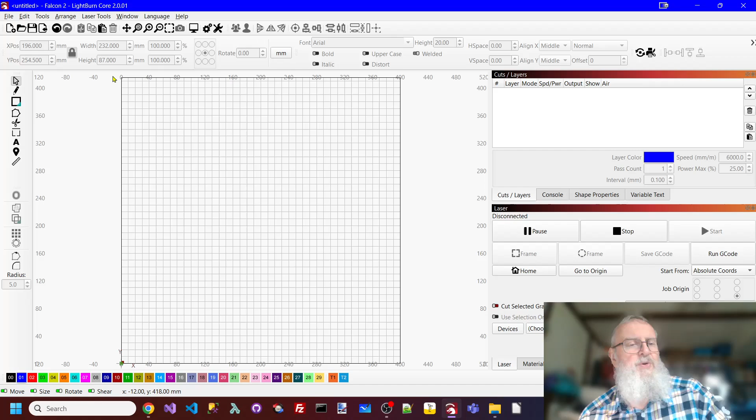So let's switch over to LightBurn, and here we are. This is LightBurn. So what I'm going to do is basically show you how you can effectively engrave borders to optimize your time. Now, you may or may not want to use one or more of these, but this is what I come up with. So I'm using LightBurn 2.0.01. It's the latest version. Most of the settings that I'm going to show you were available in earlier versions of LightBurn as well.

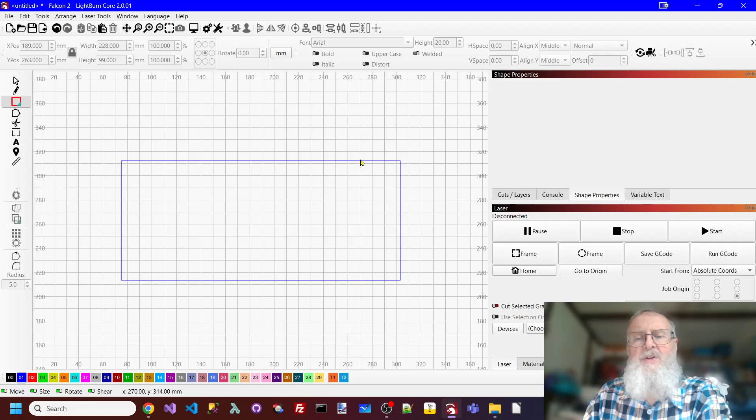So first of all, I want to create a rectangle. I'm going to put it back on line mode. Okay. And I'm going to zoom in here. Now, to make this interesting, if I was going to do a cutting board or a fancy sign, typically what I would do is change my corners. So I've done this in previous videos, but let's just go through my shape properties. And you can round them, so you can make them round. What I like to do sometimes is use a negative corner. Makes a nice little outline for a border.

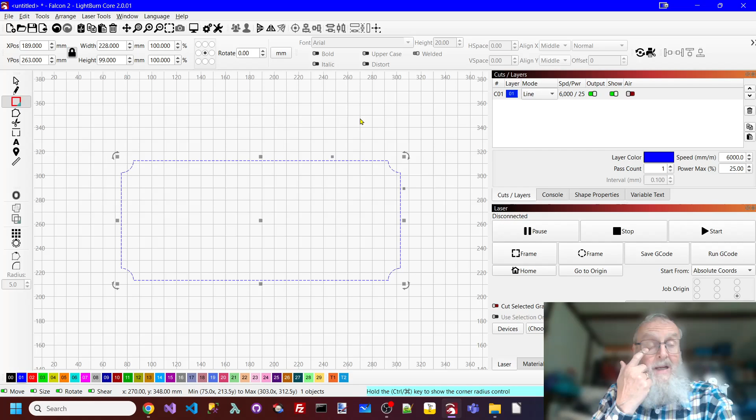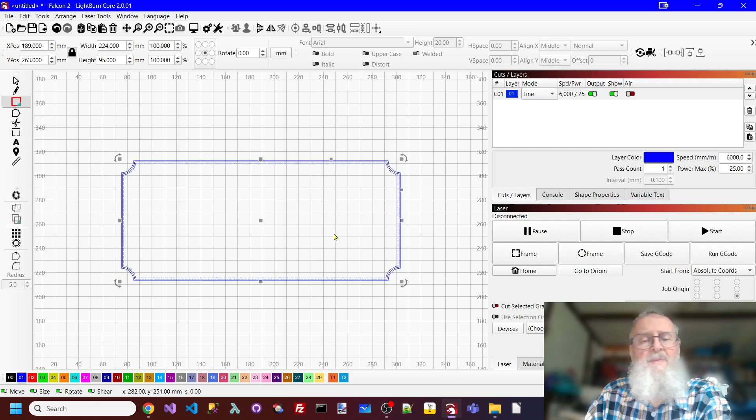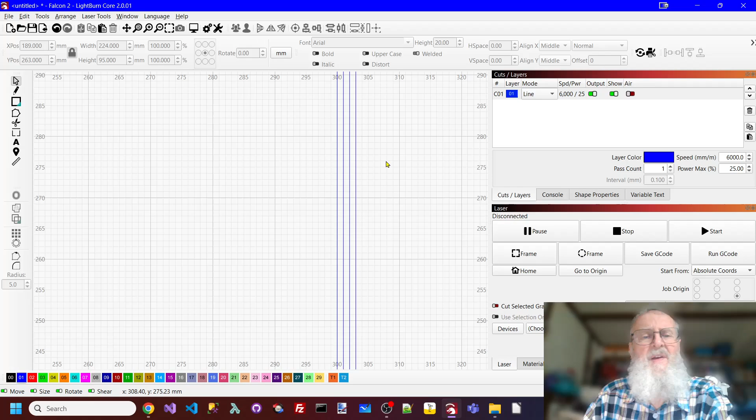Okay, next I'm going to create a bunch of duplicates of this. So I'm going to go to my offset tool right over here, and I'm going to go inward one. I don't need anything else. And I'm going to do this 2 more times. So there's one more. And to make it fancy, I'll do one more. So now I want to make sure I'm on my pointer tool. There we go. I'm going to group each pair of offsets. Okay, and go back to, now this is line mode.

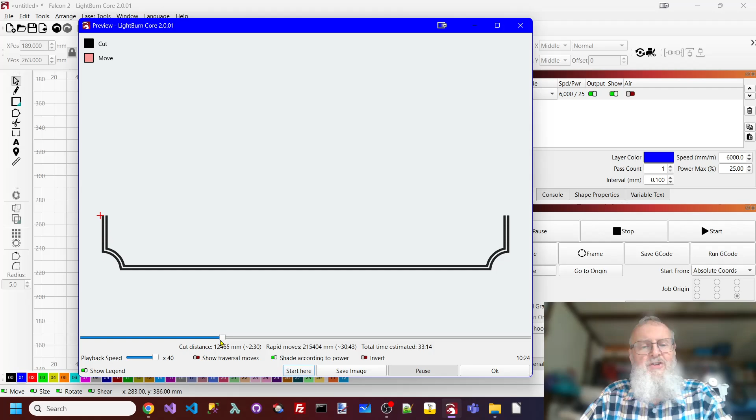Now typically if I want to make this fill, I go into fill mode, and there's my nice little border. You may or may not want to use double borders like this. Sometimes I find this kind of nice to use. But now I want to see how fast this is going to be. And 33 minutes just to do those borders. Now, if you had a lot of graphics or text images inside your sign or your cutting board, this might not be acceptable. So you can see it'll play, and I can walk through this play here. There's a lot of travel time. The laser head is moving back and forth. Okay, well, that didn't work very well.

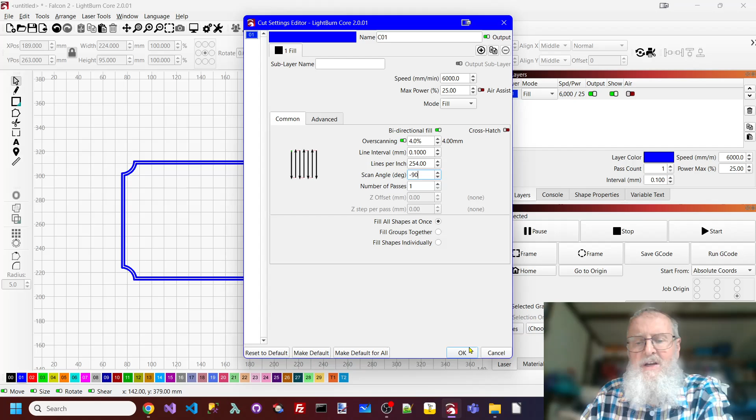So then you can go in here, and oops, I should have set this at 4. It doesn't matter. Let's just check the time here. 33 minutes. Okay. You could try a different angle. So let's go -45 for a start. So you can see where the laser head is moving diagonally. And let's check the time for that one. 37 minutes. Well, that didn't help at all. Okay, so let's try one more. Let's go -90, which is up and down. And check the time for this one, and that's 40 minutes. So I'm getting worse. Okay, so that's not working.

Sometimes you find by changing that engraving angle, scan angle, depending on what you're engraving, you can speed up your design. And I've used this several times. If I have some text that's vertical, then I will use a -90. If it's horizontal, I'll go back to 0. If it's an odd shape, I will change the angle. But let's go back and change this to 0. Okay, so that's one problem, the scan angle didn't really help. In fact, it made things worse.

So because we're on fill mode, if we go to the Advanced tab, there's a thing called Flood Fill. Now, Flood Fill doesn't work for all types of graphics fill, but it's especially nice for borders. So I'm going to turn on my Flood Fill. I'm going to go OK. Now remember, we had 33 minutes with a standard fill. And if I go to my preview mode, I'm down to 19 minutes, almost in half.

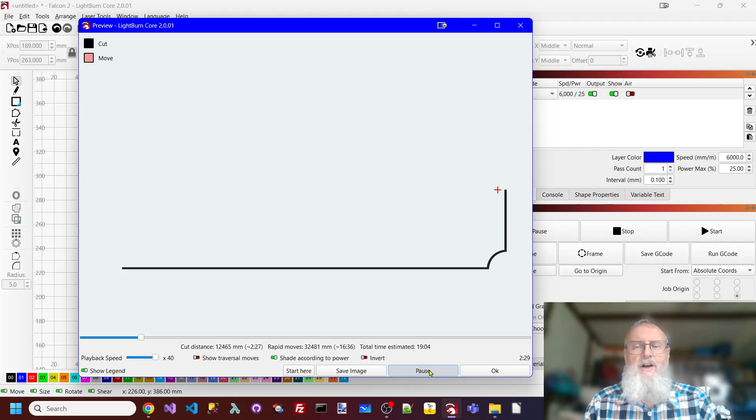Now let's watch what this does. This is kind of cool. It does that. Oh, look at that. It just does the outline. Now remember, I have 2 sets of borders here. So let's see what this does.

Here's the first one. And then it does the next one. So Flood Fill works great for borders. And, you know, I kind of like it. When I first started engraving, I didn't use it a lot, but you can see that I've cut my engraving time almost in half.

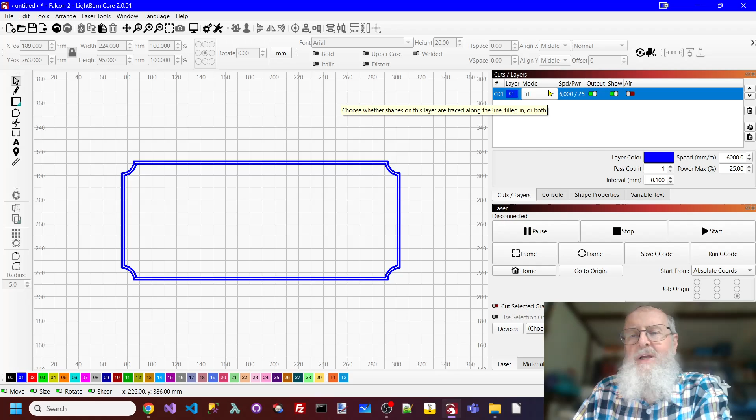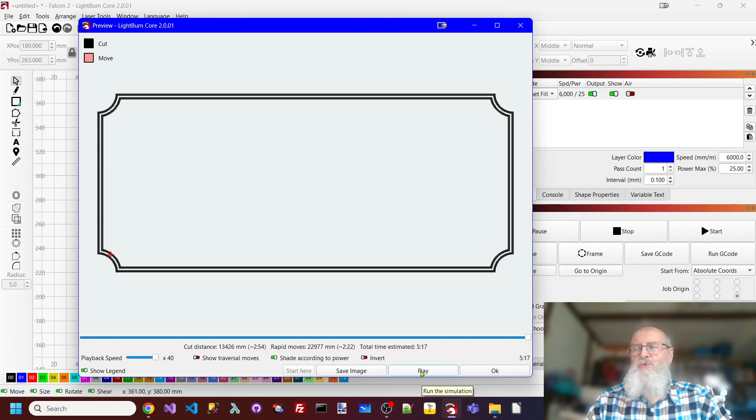Okay, so let's go and look at offset fill. Now remember, flood fill gave us 19 minutes, and this one gives us 5 minutes and 17 seconds. So what does this do? Well, let's go into play mode, and it just does a series of lines. Now this works pretty good. If I zoom in here, you can see it. Those are all those parallel lines.

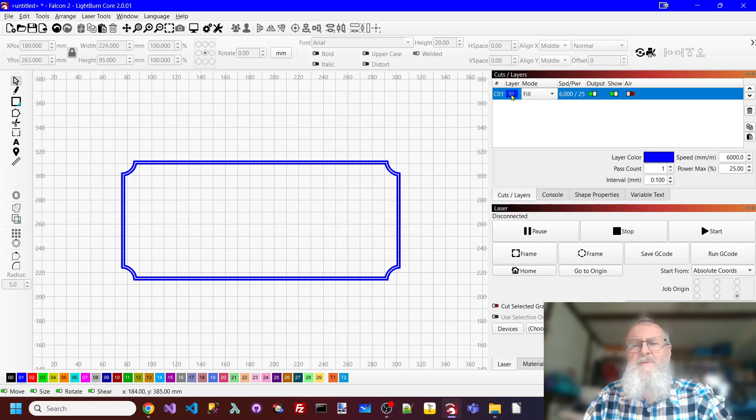Okay. Now when I go back to fill mode, and I'll make sure this is on flood fill, which it is, and I zoom in, you can see the same parallel lines, and these you can change. For example, I have it at 0.1. If I go to 0.08 and look at this, see the lines are a lot closer together, and it takes a little bit longer. That setting, which is your line interval, will depend on your laser. Now my laser can do 0.08. But if I would do a border, I'll just go back to 0.1.

The other thing I didn't mention is this over scanning. Remember, I originally had it at 2.5%. And that was great for my old laser, whose max speed was like 2,500 millimeters per minute. The one I'm using now, I typically do my fills at 6,000. So this over scan at 4% is really good for fill, as the laser will move, turn off and move 4% off, left and right, or up and down, to give you a cleaner burn.

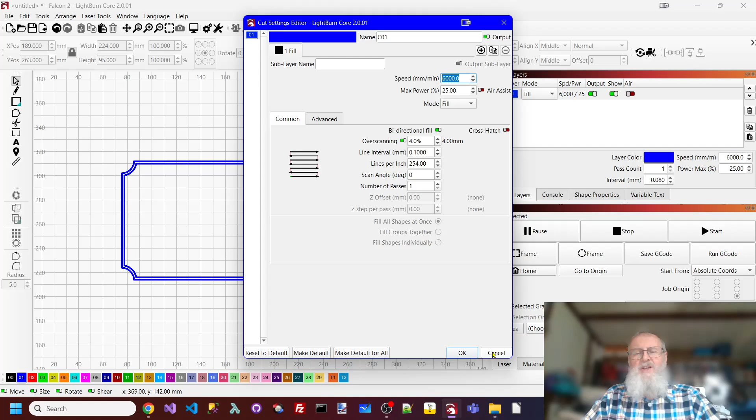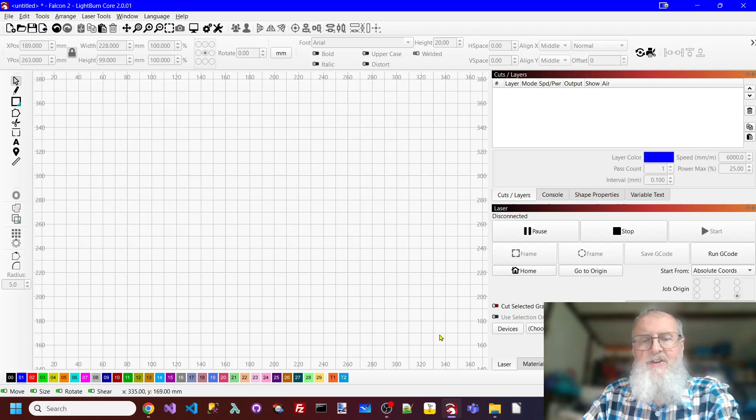Okay, so basically what we have here today is different fill modes. And basically I want you to experiment and test out what you can and can't do. So before I go too far, I just want to pick a graphic. Let's just delete all this. I'm going to pick a graphic from my art library. Let's bring my bighorn sheep in. Now, I'm going to change this back to standard fill. And when I look at that, it takes 29 minutes, and that's a pretty big bighorn sheep image.

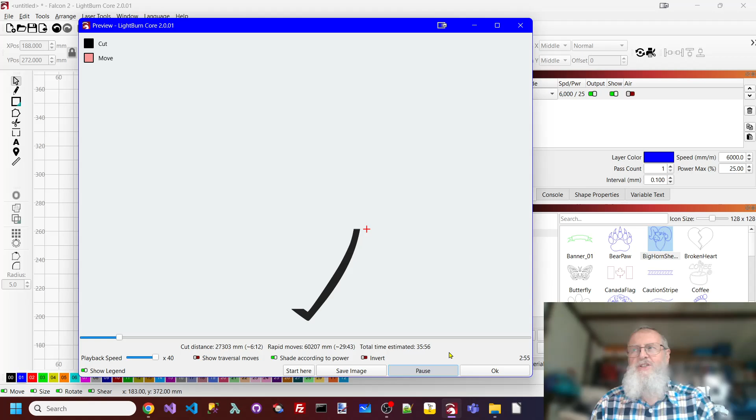I'm going to change this to flood fill. Advanced mode flood fill. Now remember, the other one was 29 minutes. It's now 35 minutes. So because this isn't a border, flood fill doesn't work very well. So I play with this. It tries to do all the little bits and pieces, floods them one at a time, and it just takes a little bit longer because the design is more complex. Whereas if I switch off flood fill and go to play, it just fills everything left and right, and lots of laser movement, but that's okay.

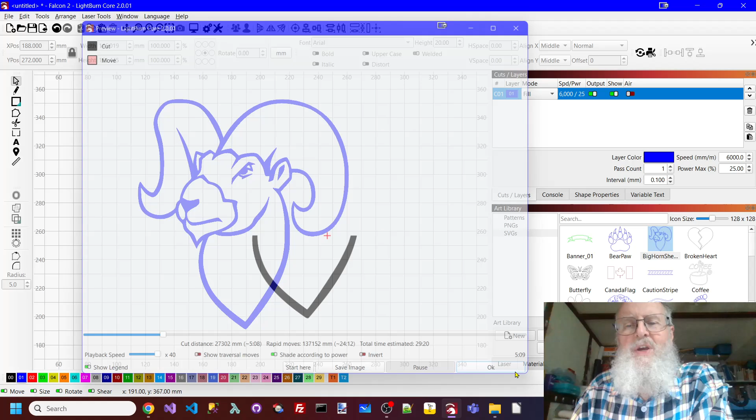So I hope you found this informative, and once again, with all the features in LightBurn you want to keep experimenting before you actually send your design to the laser. Basically what you want to do is optimize your laser time. If you are like me and only have a single laser attached to your computer, you want to make sure that you don't spend 3 hours doing a job that you can do in about half the time.